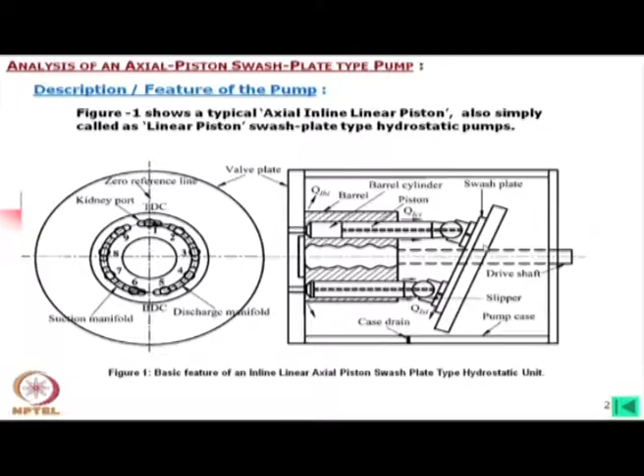Now, why is it called axial inline linear piston? Axial means the pistons are parallel to the axis of the shaft. Inline means all the pistons are in a line, acting one after another. Linear means the motion of the pistons is linear. Swash plate means this one here is the swash plate, which I will describe in the next slides also. That is why it is called swash plate type pump.

This pump is widely used. It consists of several pistons equispaced longitudinally, equidistant and parallel to the central driving shaft in a common cylindrical block called the barrel. This is the barrel, this is the drive shaft, and these are the pistons. These pistons are laid on a pitch circle diameter, and the angle between two pistons is also constant.

This is the swash plate, which is positionally fixed, meaning it does not rotate. Only the tilting angle can be changed, or it may also be fixed for fixed displacement type. The rotation of the main barrel forces the pistons to rotate with it.

Ends of the pistons are connected to shoes called the slipper pads, and these shoes slide on this inclined plate, which is the swash plate. There is a spring inside the cylinder which forces this barrel to touch the valve plate on the other side.

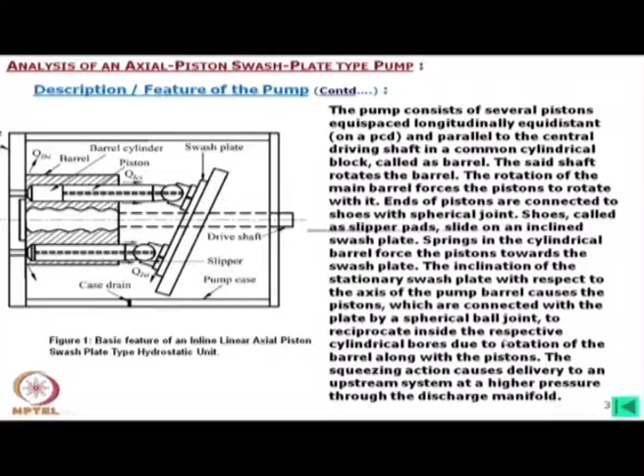The squeezing action causes delivery to a downstream system at a higher pressure through the discharge manifold. In case of the motor, the phenomena is vice versa.

During one revolution, the piston moves inside the barrel from top right to bottom left. The horizontal distance between top right and bottom left is fixed for a fixed inclination of the swash plate. This means if we increase this inclination, this length will increase, so that movement, called stroke length, will increase.

The geometric displacement per revolution, called the swept volume, remains constant for a constant tilting angle of the swash plate. Thus, the pump is named fixed displacement pump, because this remains fixed.

The end of the piston nearer to the port plate moves closer to the plate during one half of the rotation and away from it during the other half. You can understand that for one half it is in the mode of compression, and in the other half it is in the mode of suction.

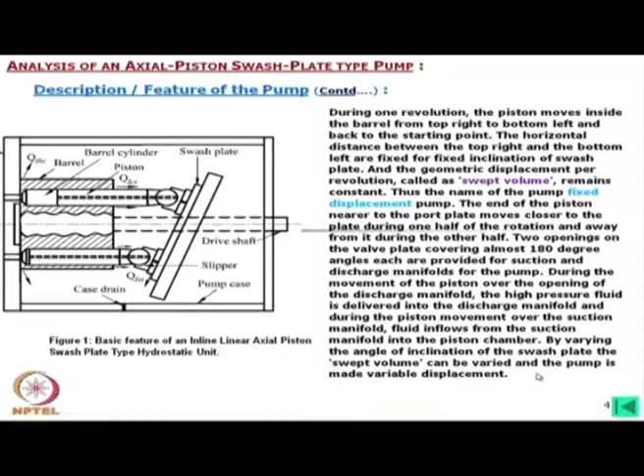Now, in this figure, if we consider this plane, then the plane behind that will be for the direction. If we consider the direction of rotation is clockwise, then from this side to this side will be the compression phase, and the other side will be the suction phase. The valve manifold we are talking about, one is for suction and another is for discharge. In case of pump, this will be for discharge because this is in the compression mode, and this is the suction manifold.

Now, to find out the flow rate for a piston, we put Qi, where i is for the ith piston. It is simply the time derivative of the volume. The negative sign has come due to the axis considered, we will come to that later, but the quantity is that the volume which is entrapped, the rate of change of volume will be the flow to a single chamber.

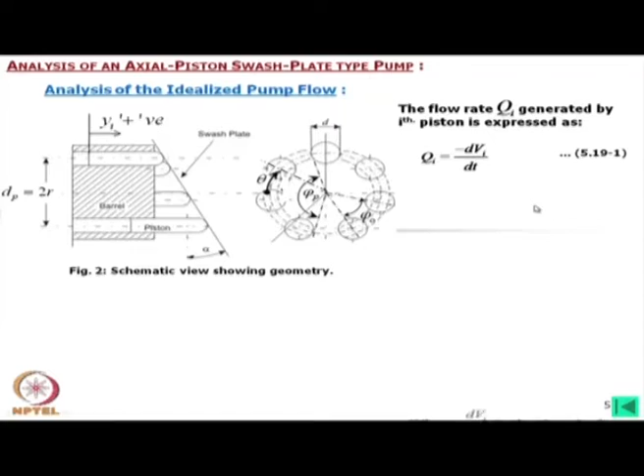Now, the maximum linear movement in one direction of the piston is called stroke. The stroke Sp can be given by considering the PCD on which the pistons are laid as dP, which is equal to twice R. The angle of inclination of the swash plate is alpha. So dP by 2, that is R, into tan alpha is the stroke at one side, and the other side also dP by 2 into tan alpha. So we can write 2 into dP by 2 into tan alpha, which equals dP tan alpha.

That is, if we consider from this point to this point, one piston will move in the linear direction by this amount, and it is called stroke. This definitely will be fixed for a fixed swash plate angle, meaning tan alpha itself is fixed. So when we are analyzing...

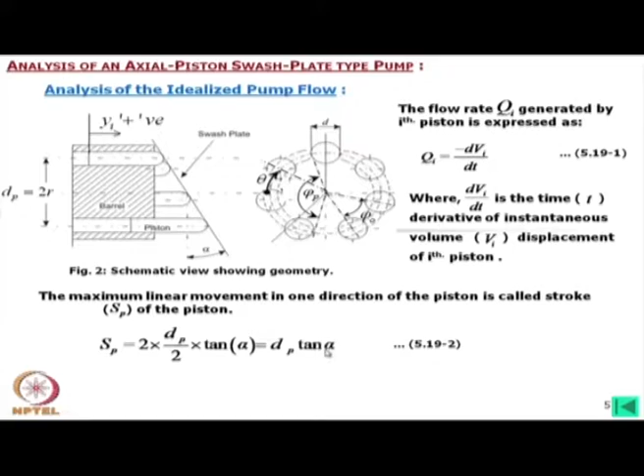Even for the variable displacement pump, our analysis normally will be at a particular angle where it is fixed, then we are analyzing. This means for the variable piston pumps, for a fixed swash plate angle, we will consider the swept volume for that fixed alpha, multiplied by the number of pistons.

The maximum volume VImax the fluid can occupy in the piston chamber is the sum of the clearance volume and the product of the stroke of the piston and the area of the piston. If Ap is the area of the piston with diameter d, then pi d square by 4 equals Ap. So Ap into stroke length is the piston volume the fluid is handling, plus there will be some clearance volume, named Vc. This is fixed for a construction, but this volume is needed when we analyze the fluid.

So VImax is equal to Vc plus Sp into Ap. Remember, this is for one piston.

If the displacement of the ith piston inside the chamber is yi, then from similar triangle considerations we get yi is equal to r tan alpha, 1 minus cos theta.

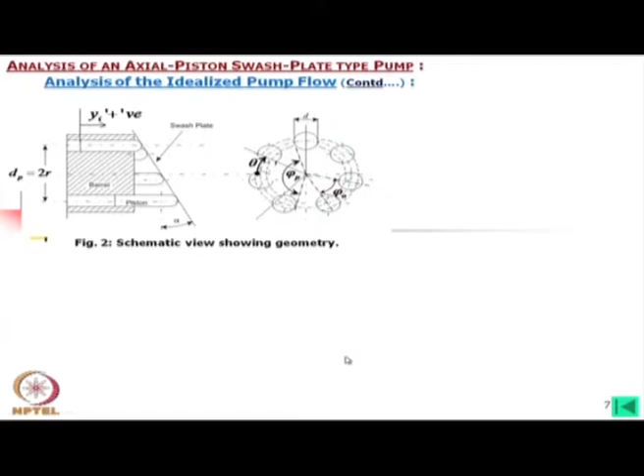This theta is the angle covered by the ith piston from the initial position. I must define that we are considering this axis system, which we will show a little later. We consider theta beginning from this point on this axis - that means if I look from the left side towards this barrel, then on the left hand side this axis, which is perhaps given as the y axis, the theta is beginning from that point.

So if I consider the ith piston, we have to consider theta plus the total angle between these pistons. Suppose this is the ith one, so we will consider this angle multiplied by the number of pistons in between, say 2, like that. Somewhere I have defined this, we will come to that.

Now, the volume of the piston chamber at any instant is Vi, so Vc plus ApSp minus yi. y1 we have now defined as the piston movement, so Sp, if it is the total stroke, minus this yi movement is the volume at that instant. Therefore, dVi/dt is equal to minus Ap dyi/dt. I think this minus sign has come over here due to these derivations, that is why we put a minus sign here, so that ultimately it will again become positive.

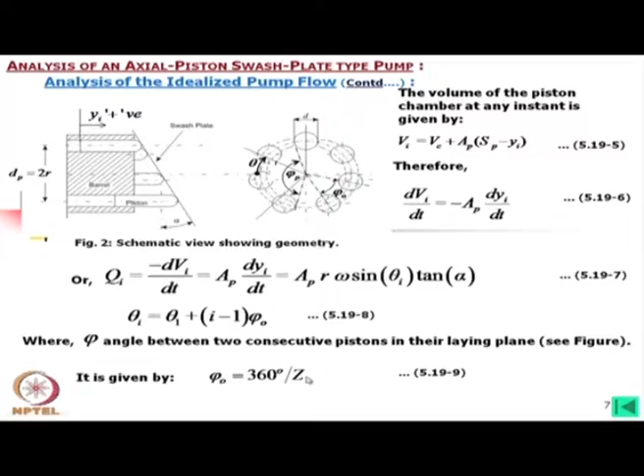Here the subscript O will be there. So this is the angle between two pistons, given by 360 degrees divided by Z, where Z is the number of pistons.

Now the total flow rate into the suction, that is yi positive, or discharge, yi negative, manifolds are given by the same equations, because here we are only defining the quantity. But we have to consider y positive and y negative separately, because if we integrate together ultimately it will become zero, since one is positive and other is negative. So that consideration we have to make, and if we do it, then this will be the expression.

So while considering qi, we consider the pistons which are in the suction zone or in the compression zone. Ideally this should be equal, but if we consider leakages, then these two will be different. Sign of yi automatically comes from equations, but to quantify how much it is pumping, we have to take care of this.

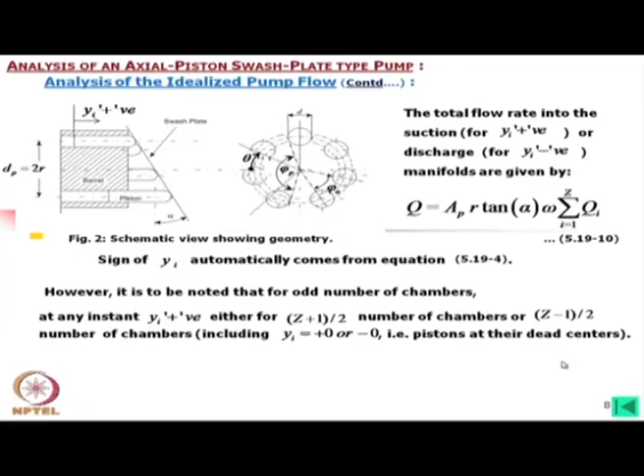However, it is to be noted that for the odd number of chambers, at any instant yi positive for z plus 1 by 2 number of chambers or z minus 1 by 2 number of chambers, including yi equal to plus 0 and minus 0. What does it mean? At any instant, suppose one piston is in the dead zone, between the two manifolds, still we may write z plus 1 number of pistons in suction and z minus 1 in suction mode, suction and compression, or the next moment it will be just the opposite. That automatically comes from the equations, because the negative sign will appear for the negative direction motion.

But suppose if there are 7 pistons, then what may happen? 4 pistons either in the suction side and 3 pistons in compression side, or vice versa. Momentarily one piston is at the dead zone, 3 pistons in suction and 3 pistons in delivery. However, we need not take special care, suppose we are working with 4 pistons in the suction zone, when the 4th piston comes into the dead zone, automatically its yi will appear as 0.

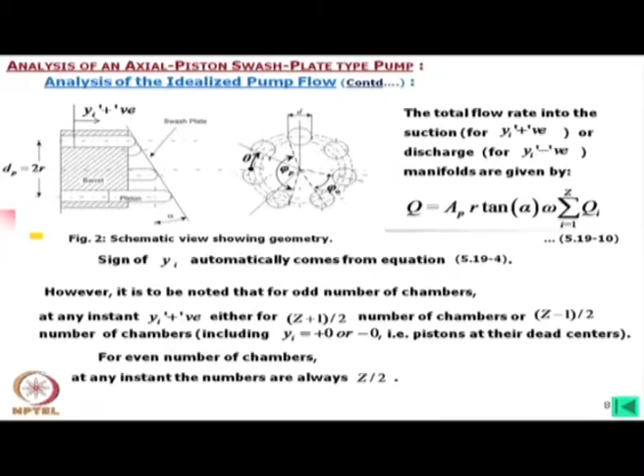Now using the integral average of the above equation, the nominal discharge flow of the pump may be expressed using the summation sign. Instead of that, if we integrate, this is a constant part, because we are considering a fixed alpha, and omega, the speed, which is also constant and not varying, and Z is the number of pistons. So we take this outside, and only the integration part inside remains, sin theta from 0 to pi d theta, which gives the average flow. We have integrated from half of the angle, so 0 to pi, and this gives us the nominal average flow.

Dividing the general flow equation, dividing the general flow equation by the average flow we estimated like this, the equation derived above gives us the normalized flow rate, which is given by this. So this is the normalized flow rate. That means, if we plot this, it automatically gives us the ripple.

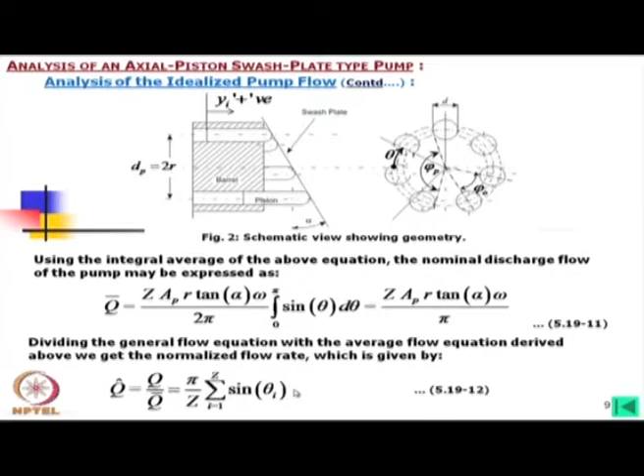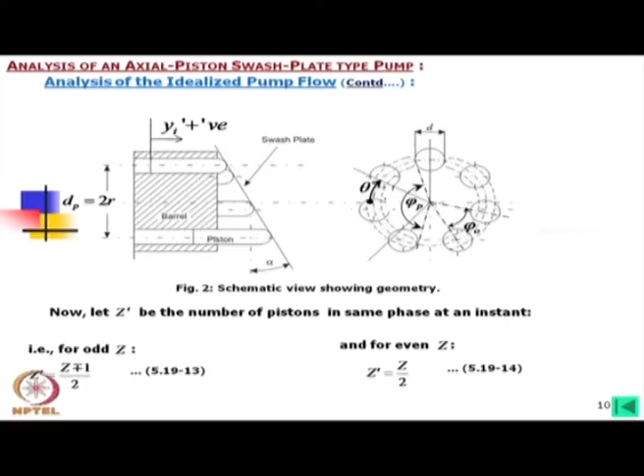Now, we consider Z dash to be the number of pistons in the same phase at an instant. That means Z dash is equal to Z plus 1 by 2, or Z minus 1 by 2 in case of odd number of pistons. In case of even number, this is simply Z by 2. This is how we express it for odd and even numbers.

Now we can show that this expression, since we are considering one side only, we will take Z dash here, and for that this equation can be expanded in this form. This is a matter of mathematics.

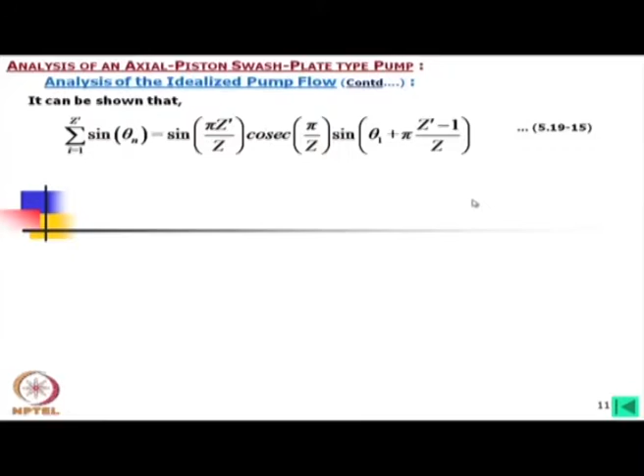So you can expand it in this form, and then for simple trigonometric consideration, this reduces for even and odd cases as follows. For odd number of pistons, q0 will be expressed by pi by Z cosec pi by 2Z, cos theta 1 minus pi by 2Z, for theta equal to theta 1, where Z is the number of pistons.

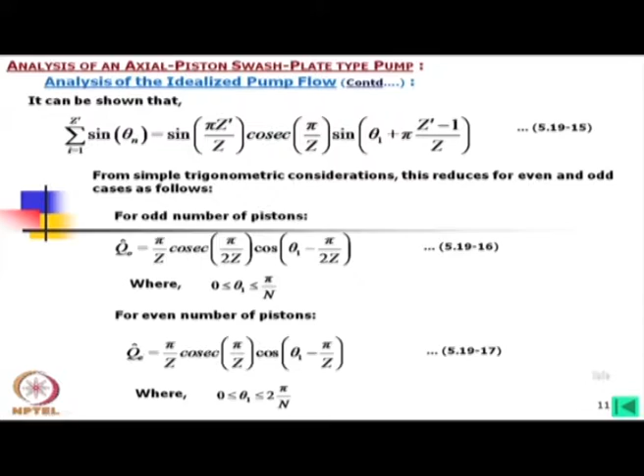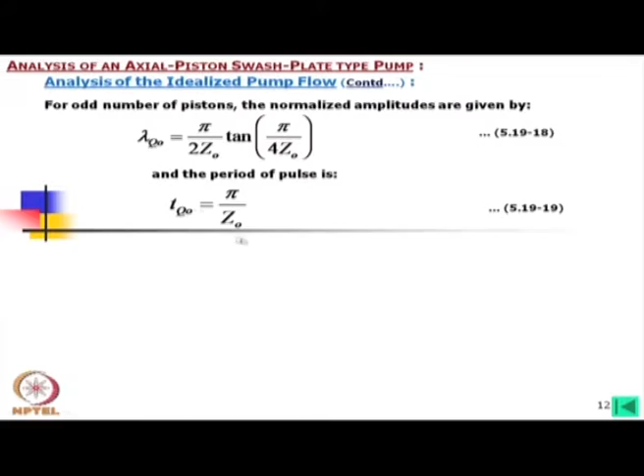Z is the number of pistons. Here also, for even number of pistons, the expression becomes like this. Now, in these two expressions, the amplitude can similarly be defined, and the period of the pulse is pi by Z0. This is of course for the odd number of pistons.

For even number of pistons, you can see the differences. We have used subscript E and O for even and odd respectively. So you can find this amplitude and the period. Here the period is higher and the amplitude is also greater than this.

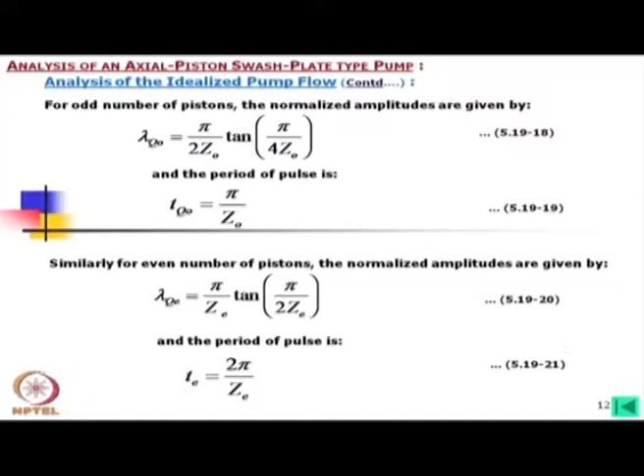As we have already revealed from our phasor analysis and these earlier two equations, I would not say simplified, but I would say that in phasor analysis we have used a simplified formula. Here this formula comes out fitting exactly to this axial piston pump, but you will find this value will be very close.

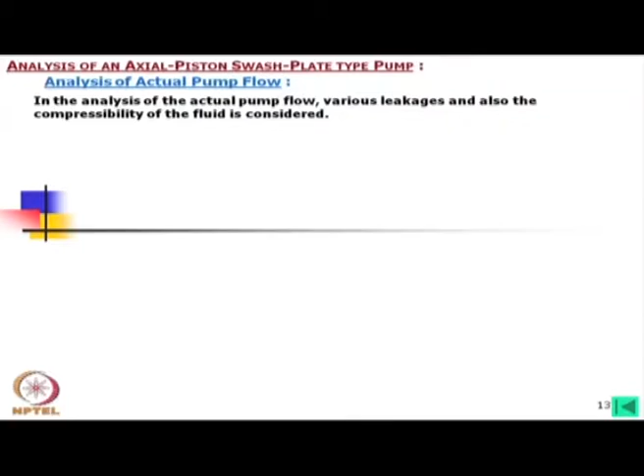Now we will consider an actual pump which we would like to analyze for the ripple. What we should consider when we go for actual analysis of a pump, our main purpose is definitely to find out the flow there and ripples, pressure ripple, all such parameters related to the performance of the pump. In that case, the important thing we must also consider is the leakage.

Now, the flow rate from the orifice equations is already known. We can write this equation considering this sign, depending on this sign, which will indicate which direction it is flowing. Then this is the coefficient of discharge, and this is the area, the general orifice area of the i-th piston, which we need to calculate.

The CD, coefficient of discharge, should also be verified depending on the size of the orifice, and its shape and size. Now, usually there is no way except to go for experiments, but what is normally done, depending on the orifice geometries, irrespective of their physical sizes, depending on the shape, at different openings of such orifices, the CD will be fixed.

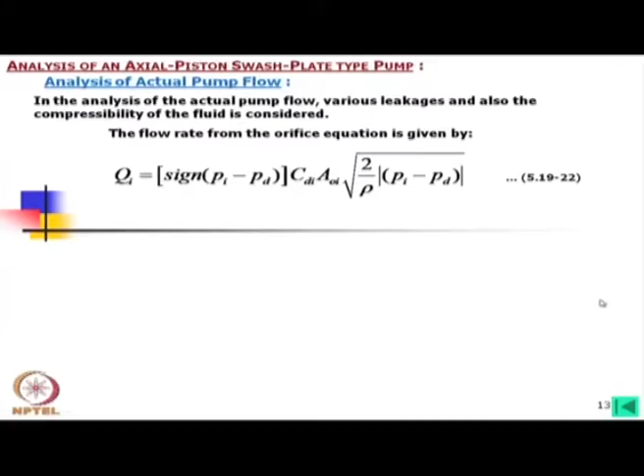Now, here Pi is the instantaneous fluid pressure within the chamber, Pd is the discharge pressure, and AOI, as I already described, is the cross sectional area through which the discharge is taking place. We will explain further. CD I have already explained, and rho is the fluid density.

Sometimes this rho we have defined as rho O for oil. The cross sectional area AOI is to be calculated knowing the instantaneous port geometry, as shown in figures 3, 4, 5. We will come to that in the next slides, and how to calculate the area.

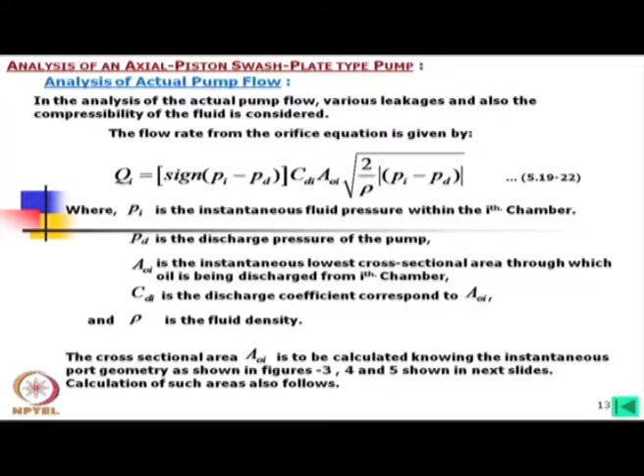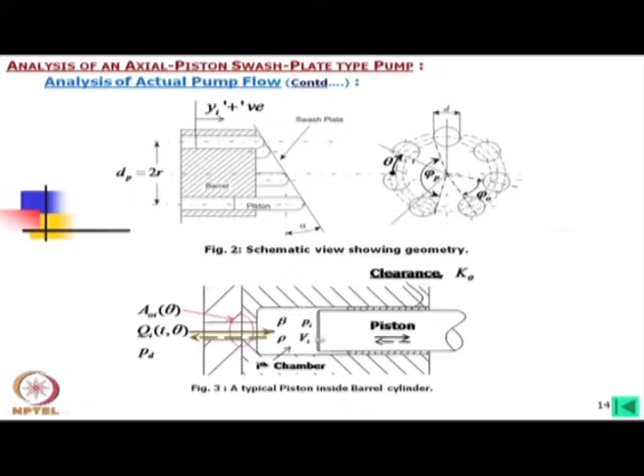Now, as I told, CD we can judge from the shape, but at every instant we have to calculate this orifice area. How is it calculated? This figure shows the different positions, and this is the piston nomenclature. Here the AOI, apparently we are looking that this is constant, but it is not; depending on the position it is varying, and we have to calculate this area.

Now, how is it varying? Here this is the port we have shown, the manifold, this is actually continuous. On the barrel we could leave this hole as a bore equal to the diameter of the piston. That means this could be made a through hole, but you will find normally this cylindrical hole runs up to almost the end, but the end is not the cylindrical hole.

Instead of that, there will be a small kidney port. This is kidney pattern, it is written kidney pattern, usually it will be of this shape.

Now, interestingly, say this included angle is phi; this angle ideally should be equal, that means this is the dead band zone, from this point to this point is the dead band zone. Ideally it should be equal, but you may find that on one side it is less, on the other side it is slightly more.

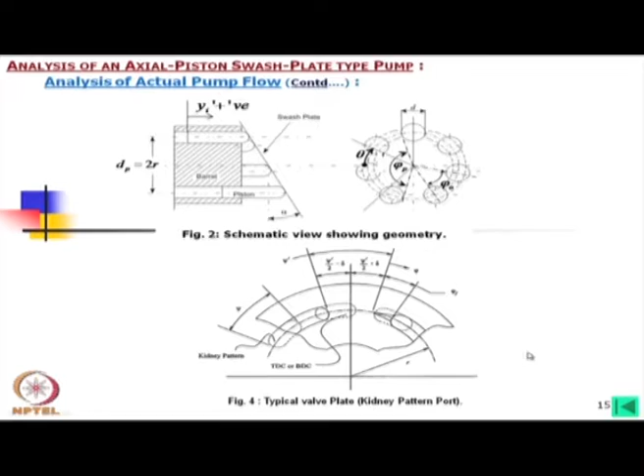Whereas if you provide this silencing groove, the pulsation in the pressure will be controllable, and there will be less noise. That is why the name of this groove is the silencing groove — it controls the pressure pulsation which reduces the noise. So we need to calculate, depending on the shape, what the areas are.

The total discharge flow of the pump is equal to the net flow generated from each piston chamber instantaneously positioned over the discharge port. Dividing this sum total by the nominal flow, we get the normalized flow.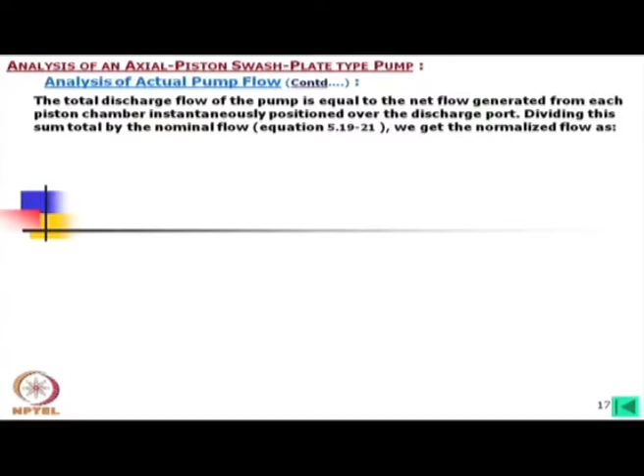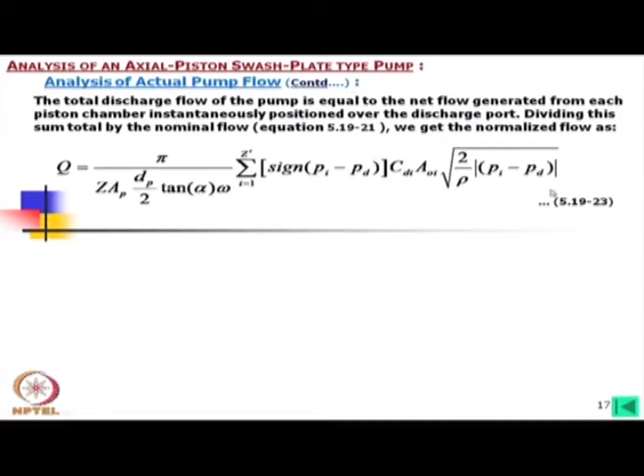In this case we have considered the elaborate equations, and this is now coming in this form. Earlier I have shown the simplified one, where we considered the area, coefficient of discharge, sign of the pressure, etc., but it is more or less similar. We have just replaced the flow equations with this little equation.

Now, the pressure in each piston at an instant is estimated from the consideration of bulk modulus as follows. We are considering inside that total volume, and then we are also considering bulk modulus. Why have we considered such things?

Because with the increase and decrease in the pressure, there will be an effect on the fluid compressibility, which will ultimately control the pressure. So, to find out the pressure fluctuation, we need to consider the compressibility of the fluid inside the pistons.

Now, Q leakage i is the leakage that occurs due to the clearance between the piston and bore, and any other leak paths that exist in the design of the piston chambers. Normally, while calculating this pressure development, we need to consider the leakage past the pistons and the bore, that is most important. So, that leakage we have to consider within this equation.

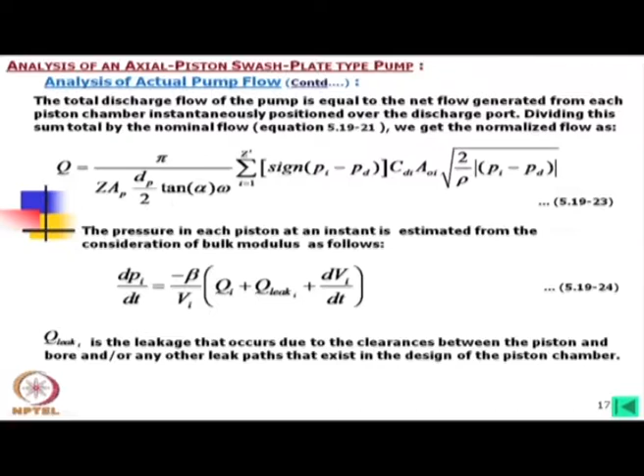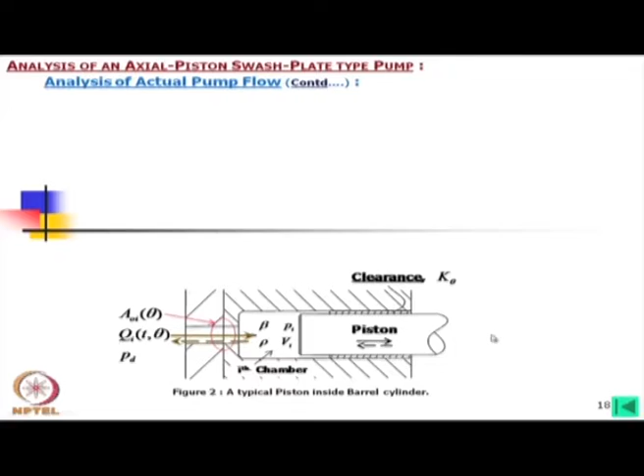But the problem is, say here I have shown particularly this leakage is important. Also there might be some leakage through this point also, but we need to consider these leakage characteristics, which involves two factors we should consider.

One is k theta and another is the clearance. Now, the clearance is from the geometric dimensions - measuring those dimensions, considering the tolerances, we can easily estimate what the clearances will be there. But k theta is the leakage coefficient which we need to estimate.

You can see this, that Q leakage is defined by the instantaneous pressure in the ith chamber multiplied by this constant.

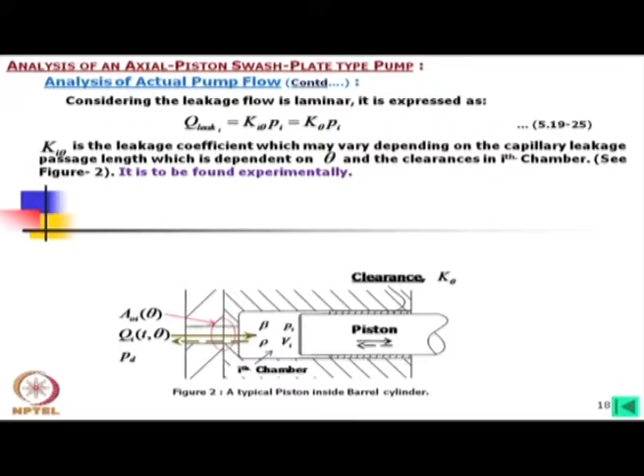Here the k i theta is the leakage coefficient which may vary depending on the capillary leakage passage length, which is dependent on theta. Theta is the angle. That means this length is varying, this capillary passage length is varying.

So that is important. Depending on that, this coefficient will also vary, depending on theta, and the clearance in the ith chamber. However, this k i theta is found mostly experimentally.

Now, this clearance - normally for a pump we may consider all chambers and pistons as having equal clearance, but actually it is also varying. So depending on that, I would say that for each and every chamber, the k i theta will be different for different theta angles.

I mean, for the same theta angles, even if this length is equal for the pistons, pi is also equal for the pistons, but depending on this clearance, this will vary. However, this we may take as almost constant.

However, considering more or less the same clearances in all piston cylinders, we can assign k theta is equal to k i theta is equal to k theta. So, which I have used, simply we will call k theta.

Now, this k theta again will vary with the stroke length, total stroke length, but if the stroke length is not very high, say small stroke length, then you will find there is little variation in k theta. That means for a particular type of pump, we may consider k theta constant, though of course, depending on the length, this k theta will vary. But we may consider for a particular pump the k theta is a constant.

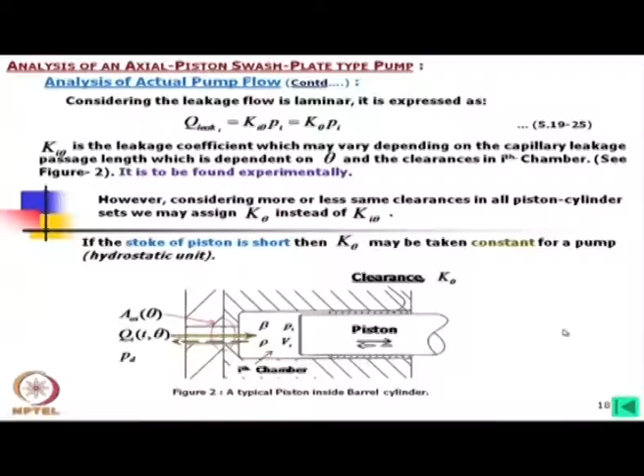The instantaneous rate of change of pressure in the ith piston chamber is given by this expression. I am not showing the derivation of the equations, but if you derive dpi by d theta, considering all the appropriate equations, we will easily arrive at this expression.

Now, this is difficult to remember. Suppose I ask a question on that, I will definitely give you this formula, do not worry about that, but you should understand it. Here, since it is under a root, we have to take care so that it should not become minus. So we have taken the mod of that.

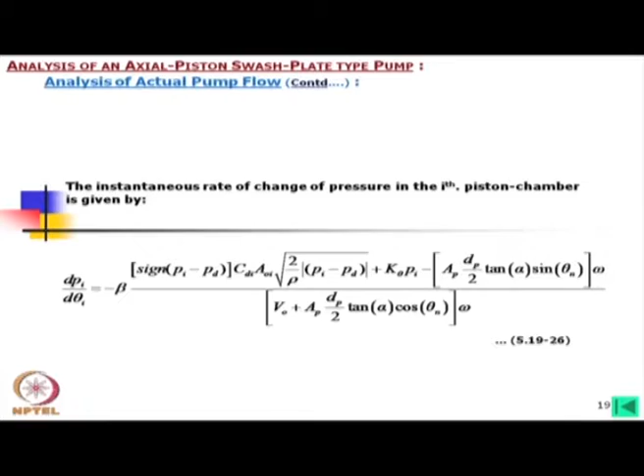And beta is the bulk modulus of the oil we are using. This again varies with temperature and pressure, but for a pump performance within a range, maybe ambient temperature from 5 degree centigrade to 70 degree centigrade, and pressure varying from 0 to say 15-20 megapascals, we will consider only one bulk modulus for such oil.

Now, determination of the port area - we need to find out the port area as I have told. So we must consider in detail what will be the port area.

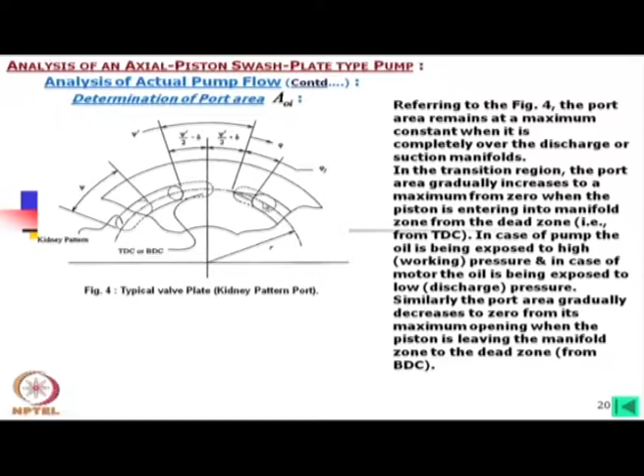In the transition region, the port area gradually increases to a maximum from 0 when the piston is entering into the manifold. But keep in mind, this length of the kidney port is more than the silencing groove. So when it is gradually coming over this port, first it will cover this silencing groove, then it will start covering the main area of the manifold. So until this end is reaching the full manifold, the area is gradually varying - initially on the groove, then on the main manifold - that we have to carefully calculate.

Now, this area calculation, as I have told, I will show you later how this area is being calculated. But here I have shown you only the flow ripple, considering this is a real pump.

Now let us study this data: bulk modulus beta is normally 10 to the power 9 pascals, sometimes it is taken as 9 into 10 to the power 8, something like that. Coefficient of discharge is 0.62.

This I would like to mention - usually these grooves are made in such a way that it acts as an orifice, so that we can use this coefficient 0.62. We have studied the von Mises criteria to determine this CD. Usually we design the orifice to have a coefficient of discharge equal to 0.62. However, depending on the pump manufacturer, they can also define what coefficient of discharge we should consider, or we can find it experimentally in the laboratory.

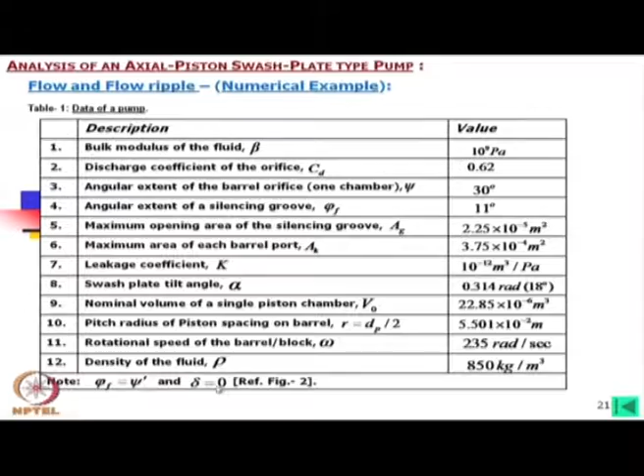Here I have given these two angles, and delta is equal to 0, and then for that we have plotted these equations. Look at this, for 9 pistons the ripple is coming like this.

Please note that we have considered the overall volume displacement is same. We have not mentioned the diameter of the pistons. So therefore, what we have considered from the average flow is same, considering that for 9 pistons you can see what the ripple is, and for 7 pistons, this blue one, but as you see for the 8 piston it is increasing.

Now, we have already shown that in case of even pistons this will be higher by the normal phasor equations. Here actually we have used the actual equation to plot the flow, and then we have shown what will be the ripple.

It can be seen from the analysis of the ideal case flow that the pump with even number of pistons has larger pulse time period and also larger amplitude than the odd number counterpart. As we have discussed earlier in the phasor analysis, such ripples are undesirable due to the resulting large fluctuation and noise. That means we should not go for even number of pistons.

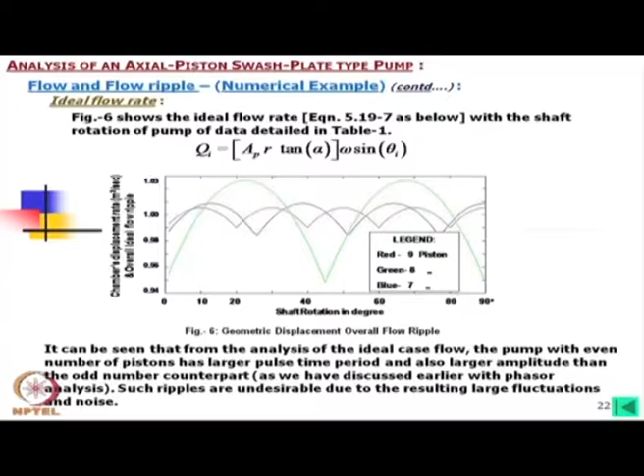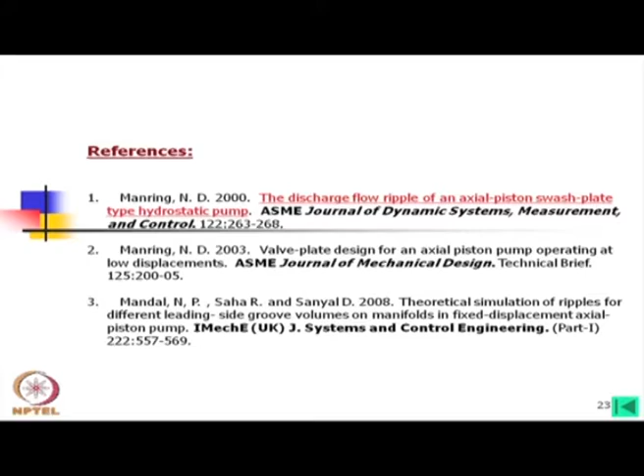So these are the references. I suggest that you should read all these 3 papers to understand this phenomena, how these flow ripples are calculated in detail, but here we have considered only the simplest pump. This pump may be more complicated depending on the pivoting point of the swash plate and others, but that you have to add, you have to take care of the geometric and trigonometric relations there.